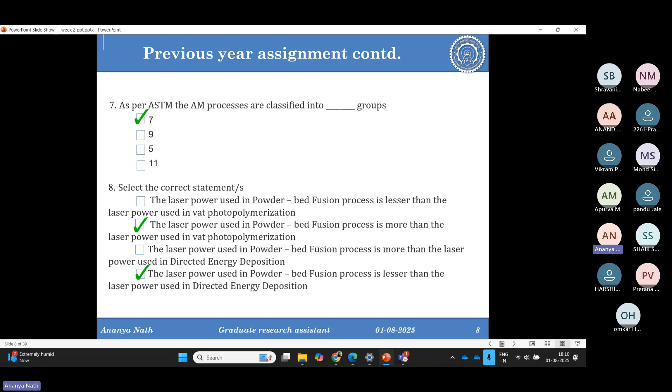Then it's option 7. So 2 is also correct. In vat photopolymerization, you just need the laser to cure the resin, which needs very, very less power—maybe 20, 30 watt can work there. Whereas in LPBF at least 400, 600 watt is needed.

The STL is not known by shape triangle lithography. Good. And STL format is a boundary representation.

Then we have a few lines of a triangle from the code. ASCII code is given below. So find out the unit vector in the direction of the facet normal of this triangle. Have you tried this sum in your assignment? Yes, yes. So could you do it?

So can you tell me how to do it if you have done it, or do you have questions? A cross B divided by modulus of A cross B gives the unit vector.

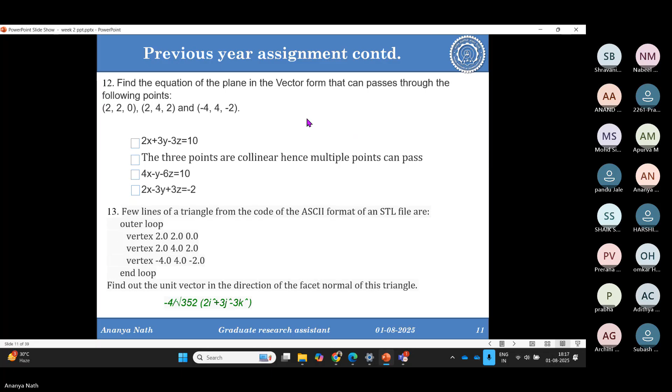How to get the pointer? Yeah.

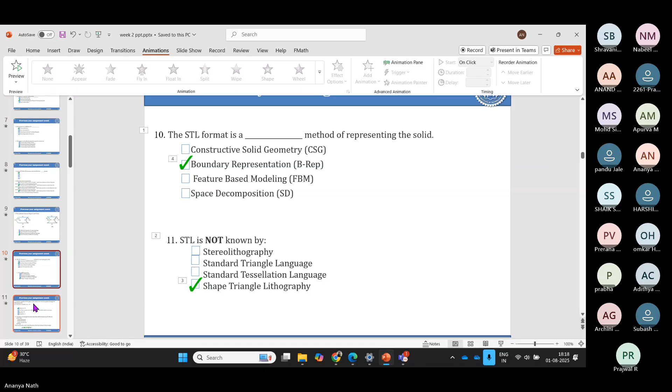Pen. Yes, so now we can write the vector, the mod like this, or determinant like this. This course includes a little bit of maths, so it's better if we revise this little trick for how to get the value of these things. First you put 2, then 4 into minus 2, that is minus 8, minus 4 into 2, that is minus 8. Like that you get the value of it, and it will come as minus 40. So it has some value.

That means these 3 points are not collinear. They are non-collinear, meaning it's possible to get the equation out of these 3 points, like a plane which passes through the triangle having these 3 points.

For that we have one formula. The formula is x minus x1, y minus y1, z minus z1; niche x2 minus x1, y2 minus y1, z2 minus z1; and then x3 minus x1, y3 minus y1, and z3 minus z1. If you put these 3 coordinates here and put x, y, z as it is, and set it equal to 0, then you get an equation out of it, and that is this equation. Is it clear? I hope it is.

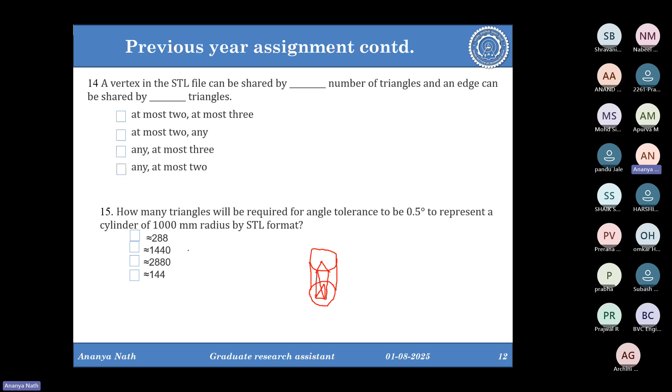So can anybody tell me the formula, or should I write it? 360 by n. Yes, so 360 by n, this is having 0.5. So n will be 360 by 0.5 degree, and that will come as 720. Into 4, so we get the result, which is 2880.

Then we have the next question: the vertex in an STL file can be shared by dash number of triangles, and an edge can be shared by dash.

Answers? 2. Last option, option D. Yes. A vertex in the STL can be shared — which is the vertices, so it's the point. A point can be shared by any number of triangles, but an edge can be shared by at max 2.

The number of triangles. Any doubt? No?

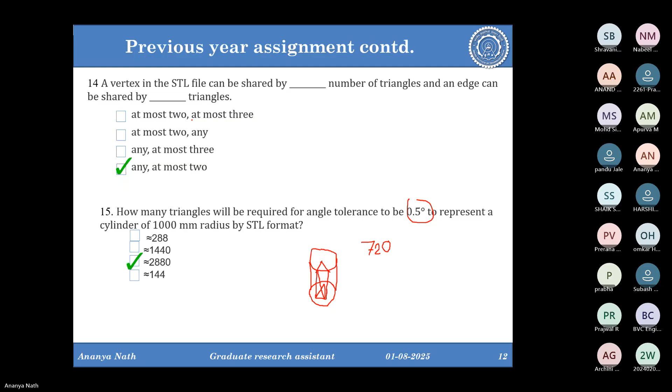So the next question we have: how many triangles will be required to exactly represent a pentagon prism in an STL format? The triangles will be required to exactly represent the pentagon. Yes, it's a tricky question, so think carefully and then answer.

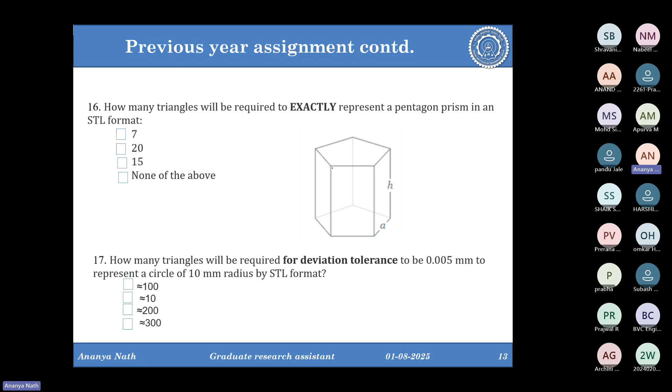How many? 7. Okay, any other answers? So how many triangles are required for one rectangle? The answer is 2, right? And we have 5 sides, so 10 we already require, right? So 7 cannot be.

Either it can be 20, 15, or none of the above. So 10 we have, plus to cover the top surface, how many triangles are required? Exactly, or minimum, how many triangles are required? Any guesses? Not a guess, but try to answer.

7. This is the top surface — I'm talking about just the top surface. So if I draw a triangle like this, 1, yes, so 3 triangles are needed to cover this top surface. So 3 into... plus the 10, that gives us the total.

So the answer is 16. Understood? So none of the above. Yeah, none of the options match. Answer is none of them.

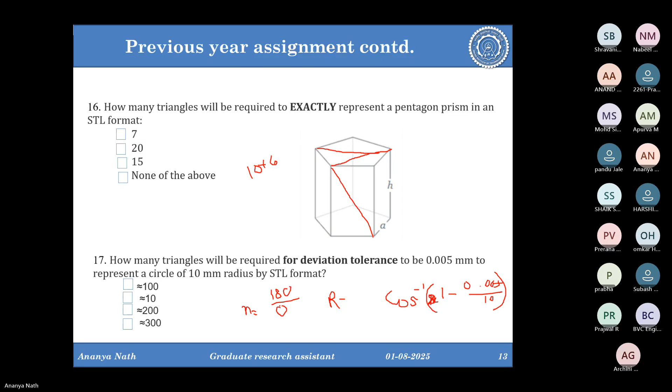Yes. So next, what to do to get the number of triangles? That is n. N will be 180 upon cos inverse theta. So 180 upon this whole theta. That will be equal to 100. So this is 100 and this is none of the above. Any doubt? This is just a simple formula.

So then we have week 2 previous year questions. If you have any doubt from week 1 topics, let me know. I will discuss it first and then we'll move to week 2 previous year questions. Or we can start with week 2 topics first and then go to the previous year questions.

Ma'am, the topic regarding continuous unambiguity, that portion is not clear. Which question? It is not in this question, but it was there in this year's assignment. Okay, week 2 assignment. Okay, that is not here.

Okay, so these are the previous year questions. So that's why I am supposed to solve the previous year questions, but you can just tell me the question that you are having doubt on. Then I can try to answer. If I can't, then I can search. Can you tell me the question?

I think I can open the question. So let me stop the screen. Does anybody remember what was the question?

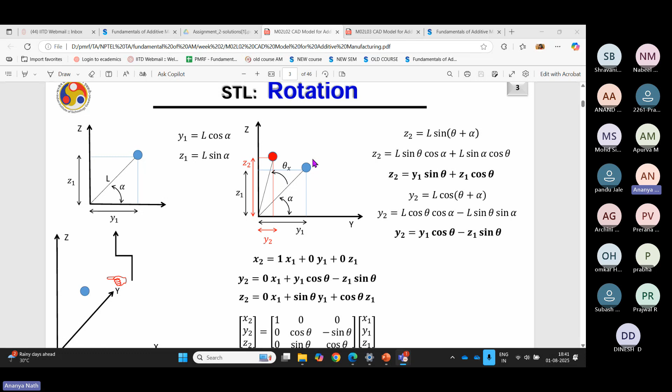If you rotate it to the theta position, then this will be L cos(theta plus alpha), and this will be L sin(theta plus alpha). You can expand the formula and get the new value of the vertices. This will be the coordinate after the rotation. This formula is very important for next week.

So week 2 question series - I will just tell you the important points from it. This is a very, very important formula. You should remember it, write it somewhere, and understand how you're deriving it as well. This formula will be used in multiple cases.

Next, we have the rotation - this is for one point. If you have multiple vertices of a triangle, using the same formula you can do that. Using the same formula, you can get the normal vector as well, because the normal vector will also be rotated in the same form. So you can get both the values of edges and normal.

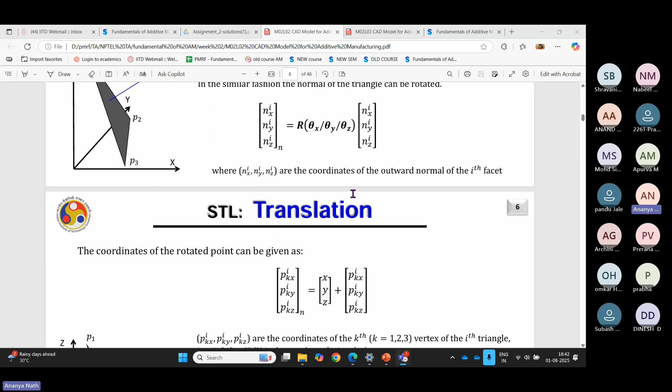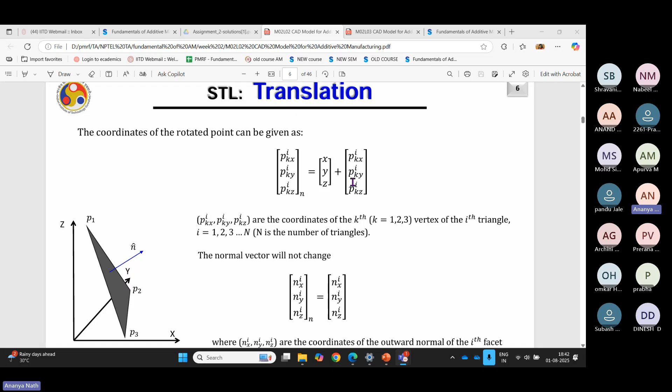Then comes translation. Translation is easy - you just have to add or subtract the value of the translation in the respective coordinates. If it's x, y, or z, you just add that coordinate value for translation, and you'll get the new position. Then comes the support structure.

As I said, this is called the orientation of the part. If this is a T shape, if I place it like that - this slide is very, very important, so you have to understand it properly. These are the three orientations I am having.

In the first orientation, we have this part and we have to place this support structure. Basically, this T is having some overhang portion, and under the overhang portion you have to put the support structure. So to print it, you have to give it T1 time.

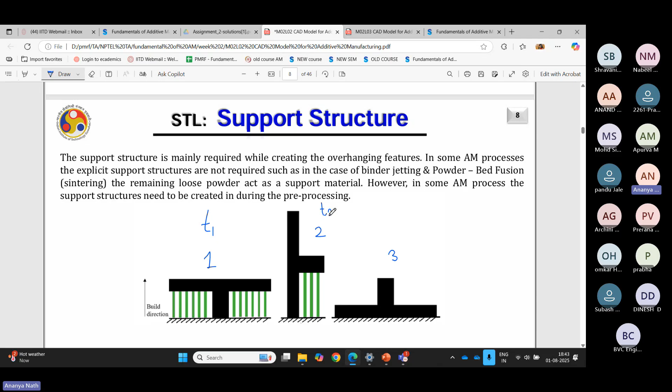This is the second orientation. Here, you will take T2 time, which is different than T1, obviously. But here you have less support - this is more support, this is less support. So now, can you tell me which one will be greater, T1 or T2?

T1. So again, it depends on the process, it depends on which additive manufacturing process you are choosing. Any other answers? Why do you think T1 will take more time? More support structure, yes.

Now if I turn the question around - if the additive manufacturing process is DED and the other additive manufacturing process is LPBF, then which process will take more time? Will it differ somehow? Because these two are both metal printing processes, but they have different process physics. So will it differ? Any guesses?

Ma'am, in T1 we have to cover more surface area, but in T2, we have to have only a smaller area to cover to print the metal. So I think so.

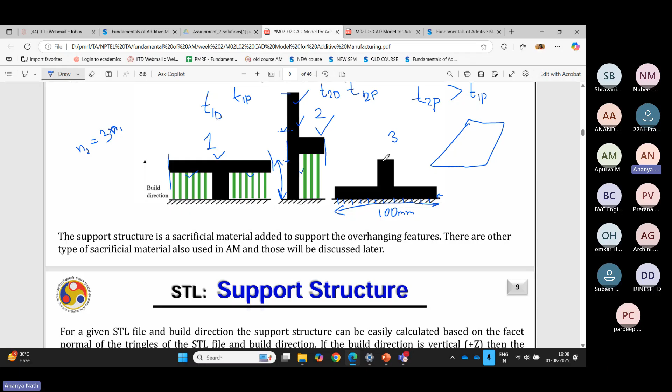Is it clear? Ma'am, I have one doubt. On the basis of DED deposition, whether one and two is taking more time.

Okay, that answer was not straight. In DED, as the material is coming at the same time with the heat source, the answer is not straight - this part will take more time.

I suppose number 2 will take more time because of the layers. But again, it's not easy like LPBF to say, because the DED head needs to move from this to this to this to print the supports. It's not same as LPBF. The DED head will move, so it will have some inertia and some velocity restriction. That's why it will take more time for each layer, so you cannot say this will take less time or more time.

Indeed. Am I clear? Yeah, because it's a different process, you cannot say this will take more time or this. But in LPBF, you'll surely say for this part at least that this will take more time. And the reason for support is clear - there are two vital roles of support: to support the overhanging feature and to dissipate the heat.

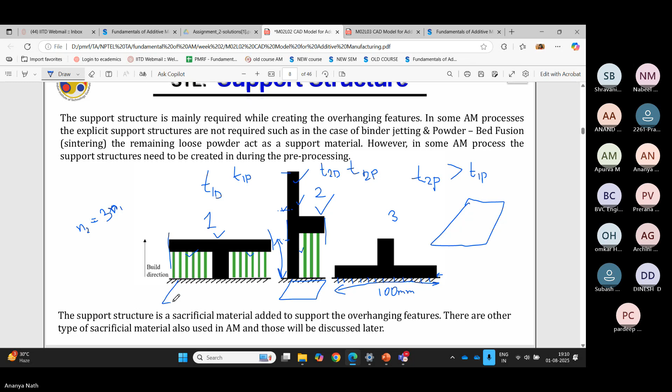No, it's like the surface area. This is the surface area for this part, this is the surface area for this part, right? Both the widths are same, the length is different, and the height is different. Width is same, so do not have to consider. Then lengthwise, it's more - this length is more than this one.

But to scan the length, the laser scan speed is already very high, and for the support printing, it's even higher than part printing. So you will not have a large difference in the layer scanning of these two - it will be very little. But as the number of layers will be almost 3 times, and in LPBF you have the recoating time also, that's why this will surely take more time.

Even though the surface area is less, since the height is more... the surface area will not matter much because this is just almost half of it, right? So it will take less than half of the time - like, to print one surface of this will take less than half of this, because the support structure will not take much time. Support printing is faster. So that's why I'm saying this will take more time because of the layering.

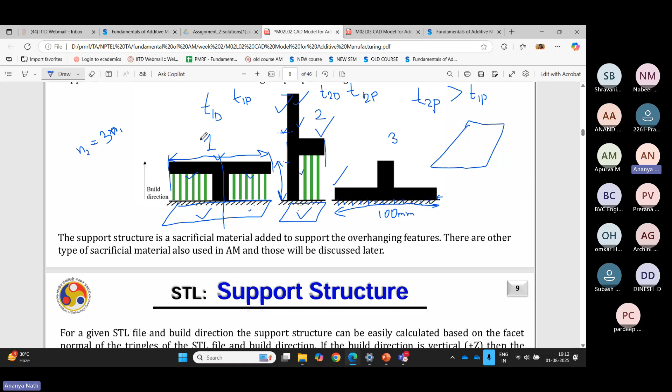Done, so let's go to the next. Orientation wise, this will be the better orientation because it's not having any support. And these two depend - if we have to have this surface to be intact, then depending on which process you are choosing, you can choose the part orientation.

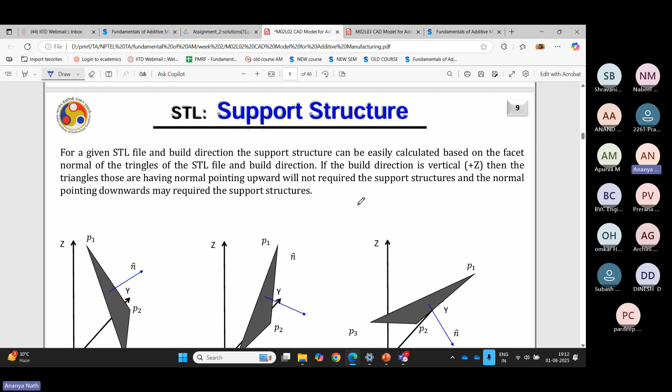So now, when do you think support is needed? Obviously, if there is an overhang portion, and that overhang is coming from the triangle itself, because the whole surface is covered by triangles, which is making the STL file, and the triangles will have a normal. If the normal is facing downward direction, that particular facet or triangle needs support beneath it. So if it needs support, the adjacent triangle will also need support, because one triangle is very small. Now how many triangles will need support, that you can calculate through a formula.

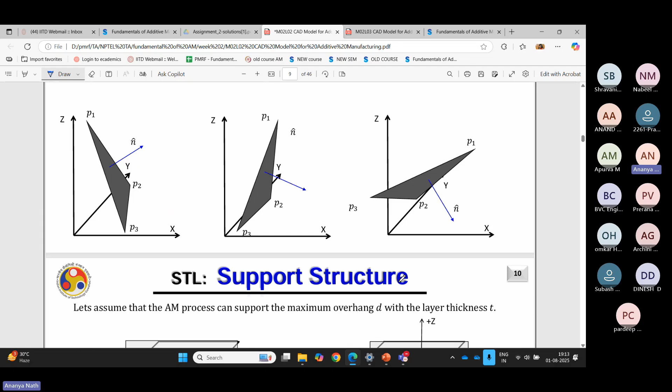But again, you can learn the formula from this - these are just simple mathematical equations, simple to understand. But the main thing to understand is why we are doing this.

You have to remember all 7 types of additive manufacturing have different process physics, because of which it doesn't mean that whatever process you are choosing, support will be needed. There will be some process which can print one geometry support-less, but other processes will need support for the same geometry. Right now I'm not having the part with me, next class I'll show you. I printed one part in VAT photopolymerization, and it was a supportless printing.

But that was the only process that could print the part supportlessly. All the other processes needed support to print the same part. So that is the difference. If somebody asks you, I have a part with an overhang structure, do I have to put the support? Your answer should depend on which process and which material you are interested in, because depending upon the material, you choose the process, and depending upon the process, you decide whether to go for support or not.

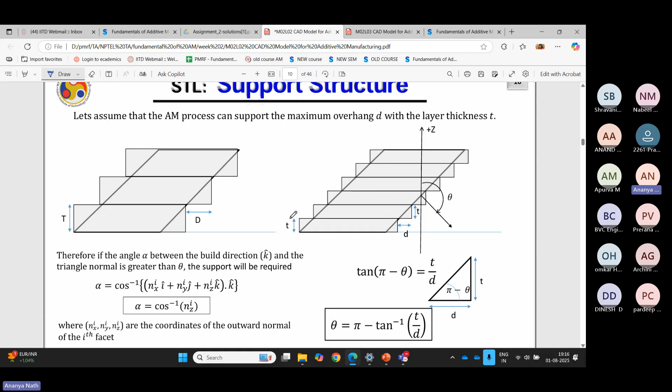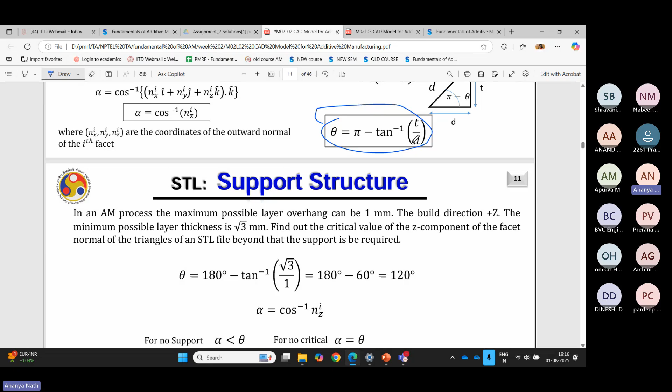So that's why your first question needs to be which material, and then which process. So this is the formula. You can note down this formula, especially since it's very important for support structure calculation. Using this, we haven't solved anything yet, so we will solve more problems using these formulas.

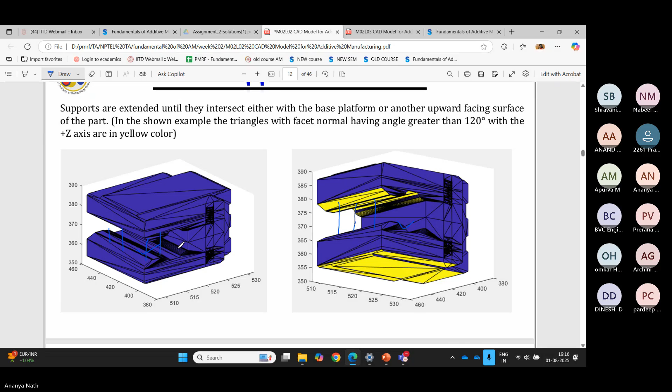So then comes this structure. It's also important that if you have a structure like this, your support will be connected to the part itself. Not only this surface will be sacrificed, but this surface too, and this one, because your supports will be connected like this, and it will be connected to this surface. That's why it's very important to orient the part.

If I orient the part like this, then you just need to have some support here. But again, it depends how much length it is having. If it's less than the overhang length required for support, then you can just avoid putting it.

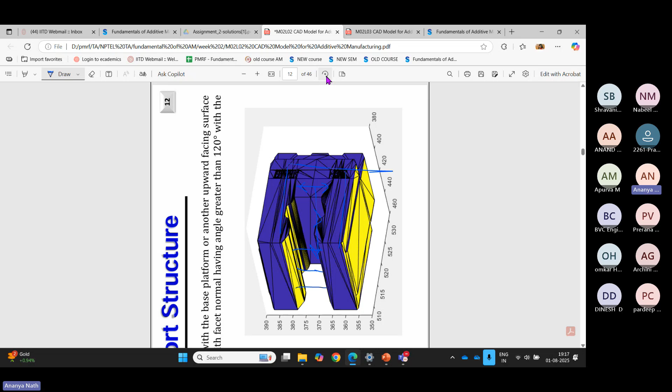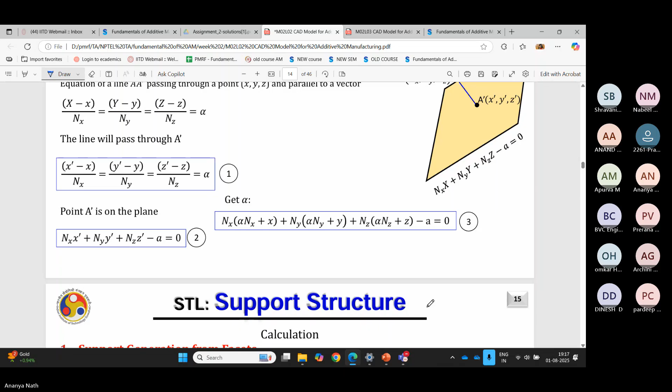Then comes the facets which need the support structure. So if this is the facet, this is the formula, you can get the angle or the length, and this is a key point you need to remember. In the sum, it will be given that this much overhang length can be self-supported, and after this you have to have a support. Then you need to calculate how much angle or how much support needs to be given, like how much volume of support is needed. So this type of sums will be there, the same type of sums.

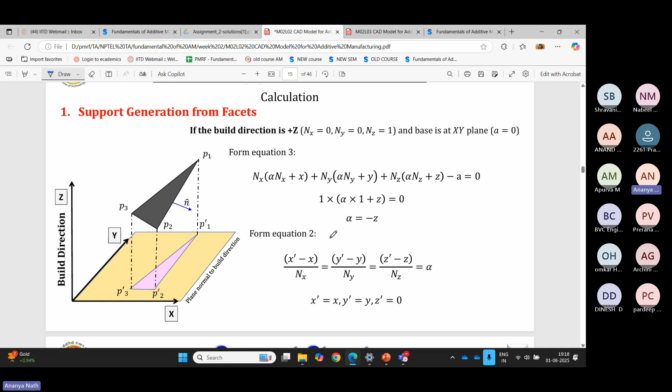That's why I'm not discussing it, because in the videos it's very nicely demonstrated, with sir giving some real examples that I'm not having here. I don't have any video, so that's why I'm not discussing these formulas. It's better to understand from there if you see the video.

So it's just showing that if this is the facet which needs support, then you need to draw the reflection or projection of it on the surface, and the projection will have the support. But for the projection, you need both the area and the height, because you need to have the volume of the support. Then you can calculate the volume of the support, or the volume of the facet which needs the support.

But it's not true that if your volume comes out to, for example, 3000 millimeter cube, you have to put 3000 millimeter cube of support. You can instead put tree-like support, which will look like this, having some branches to be self-supported and give self-supporting structure. And like that, you can minimize the volume of the support and still support the part. Is it understood?

You can have this type of supports, so you can save some surface of it, because you have to compromise the surface, and you can save the money for printing the support and the cost for the powder or the wire as well.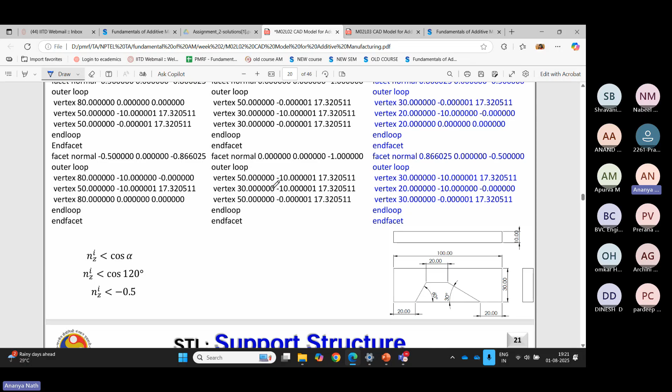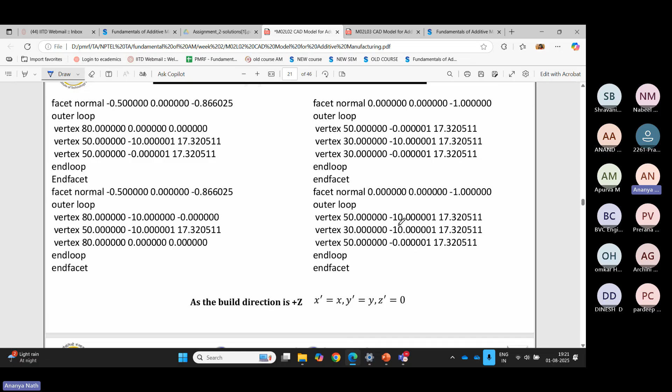Then comes the build orientation. This is the facet normal coordinates for this part to decide whether to put the support or not. There are some nice MATLAB codes that were shown in the video. I'm not having those MATLAB codes. You can go through the MATLAB codes, and if you are able to, you can make the MATLAB code and see.

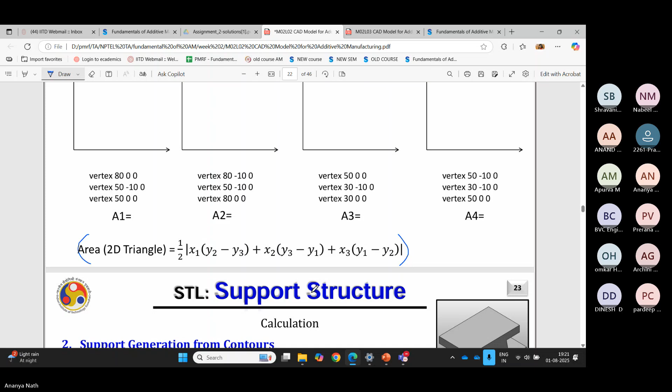This is an important formula to note down. This is the area of the triangle, how to calculate the area of the triangle. Because if somebody gives you a question with triangles that need support, you need to calculate the area of the triangle from the vertices, then have the height of the triangle, and multiply the area into height. This formula is true when it's two coordinates, like x and y. There is another formula for x, z and y coordinates.

Then there are methods for support generation. One can just calculate which facet needs support. Other method is the containment method. The containment method says you need to draw the contour of each slice. So after slicing, we can see whether it needs support or not. Or before slicing, we can also see whether it needs support or not. But you can slice the geometry in such a way that it doesn't need support.

This is also possible. From last week's lecture, if you remember, there were techniques for adaptive slicing, where in one part you put more layer thickness, and in one portion you put less layer thickness. If your layer thickness is less, you need less support, but you need more time for printing. So you have to compromise one thing.

In this method, you have already sliced the part, and you have the contours. Contours mean, in one slice, this is one slice - what is the projection of the part? If you join or merge all these contours together, you will have the whole projection of the part, and that is basically the support structure.

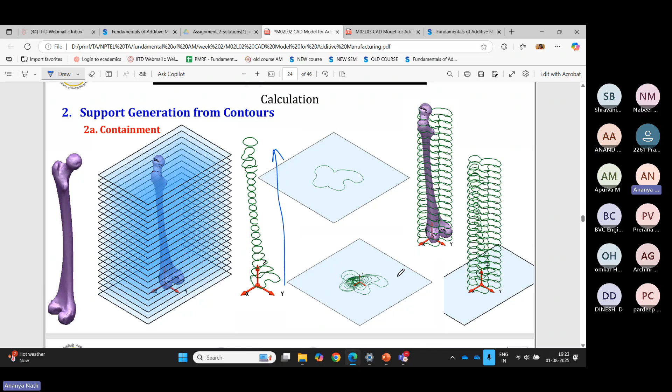For example, if you're talking about this nth slice and n-1 slice, the n-1 slice is the first layer, nth slice is the second layer. So the second layer needs some support in this area because this area is not covered by the n-1th slice or layer. This is the contour method by which you can calculate which area needs support.

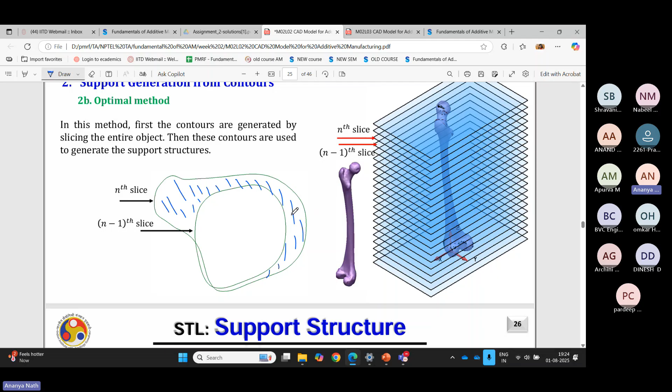So if you see this photo, it's better. If this is one layer, this is the second layer. This second layer's portion here is not covered by the first layer, so that's why this portion needs the support. Or if this part is the up layer and this is the next layer, then the difference between the two, this portion needs the support, which is here.

So you need to have support only this much. You don't have to have support in the whole area, not in the whole contour. You need to have this much support only. This is another technique by which you can calculate the support. This is just an example.

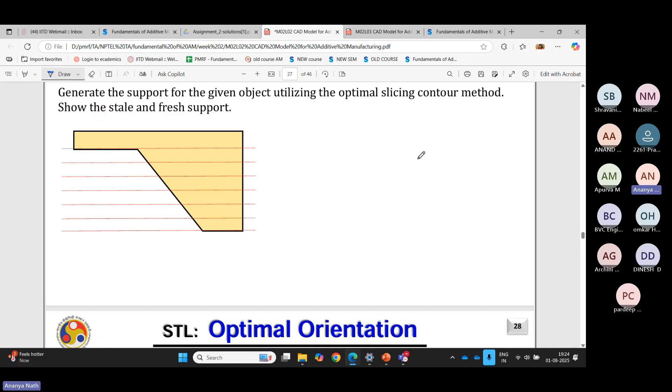Here also, in the layers, you can just put the projections, and I'll tell you one example. So this is one layer, and this is another layer. If your layer thickness is enough to self-support this portion, then you don't have to put any support. Or if your process is flexible enough to self-support this portion, then you don't need support till here, and you just need the support here.

When your support is fully in line with this inclined surface, it's called the stale support. And when you put the support in just the overhang portion, fully overhang portion, it's the fresh support.

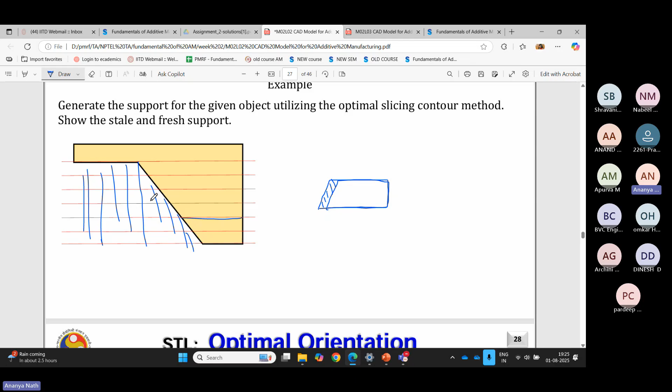So now you have the optimal orientation. As I said in the first slide, you need to optimize the support in terms of time and cost—everything is all around time and cost only. So there's cost minimization model, support minimization model, and multi-objective model.

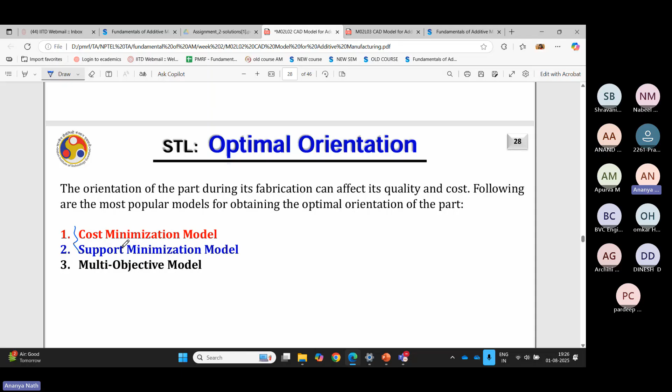These two models I have already discussed with you. In case of the cost minimization model, the total cost is equal to pre-processing, machine utilization, material cost, and post-processing cost.

Ma'am, sorry for the interruption. Yes, please go ahead. As per last week's discussion, if you had mentioned some problem concepts, that would be useful.

Okay, so I can just show you the problems from previous year question papers, and then I can tell you the formulas which need to be used for that. Is that fine? Sure, madam. Okay, let's go ahead with the questions then.

Our first question: a few lines of a triangle from the ASCII format of the STL file are given here, showing the vertices. Now you need to rotate the triangle 30 degrees clockwise about the z-axis, and then 60 degrees counterclockwise about the y-axis. Can anybody tell me how it should be done?

It's a very easy problem. First you need to put cos 30 and sin 30 into the formula for R theta z. Then for R theta y, it will be minus sin 60, cos 60. You have to multiply both of these with the coordinates.

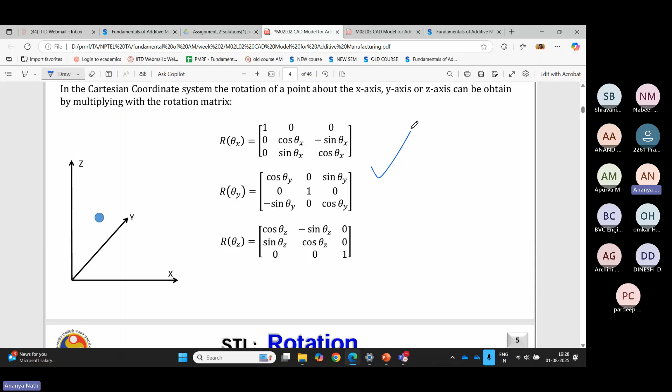The formula is very easy—we have already talked about this formula. This is the one you have to use, and then just put it like this. You have the vertices and you get the result—just multiply it.

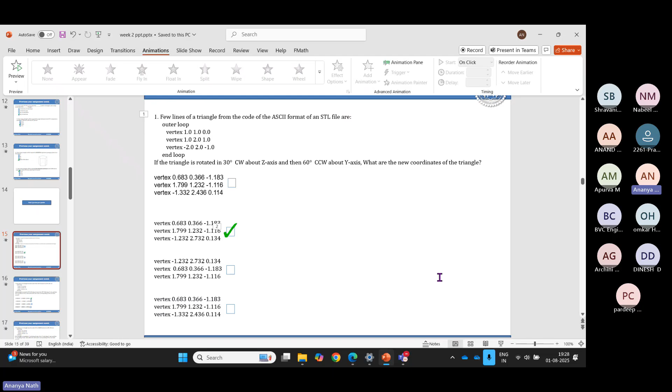Ma'am, do we keep all the thetas together, or one by one? No, one by one. First you keep R theta z, then R theta y, and multiply these two together. Then you'll get another 3x3 matrix, and you put one vertex value into this 3x3 matrix. When you multiply it, you get 3 points like this. Understood? The multiplication is so easy.

I have solved it and the same result is coming. Yeah, so you have to follow the order, and every time it should be three multiplications.

Next, we have a few lines of a triangle from the ASCII code given again—it's the same question again. This time it's 90 degrees counterclockwise about x-axis, then about y-axis 90 degrees counterclockwise, and again about z-axis 90 degrees counterclockwise.

So first you put R theta x for 90 degrees using cos 90, sin 90. Then R theta y for 90 degrees, then R theta z. Multiply R theta x with R theta y, then that answer with R theta z, and then multiply it with the vertices to get the answer. It's the same formula, same type of question.

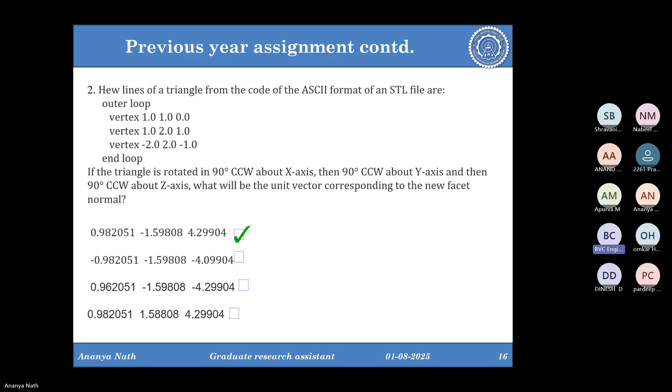Next we have the same question again, but it's translated. For translation it's much easier—you just need to put the vertices in this manner: 1, 1, 0 for vertex A. Now everything will be translated +1 in x, +1 in y, and +1 in x.

So A will be +1 in X, +1 along Y, and +1 along X. Okay, X may it's 2. So 2, 1, 0—everything will be translated in all three axes, so you just have to add it. So the answer will be 3, 2, 0 for A.

So this is the translation of the A vertex. The same way you can do it for B and C. Now you have to find what will be the vector corresponding to the new facet. For vectors, again, it's AB cross AC. AB is simple, you just have to minus it with A to C and then take the cross product.

So it's just vector cross product, and you have to divide it by the mod of AB cross AC. That's just the magnitude of the AB cross AC matrix, like x square plus y square plus z square, square root. X, Y, Z are the values which are there with the I, J, K coordinates.

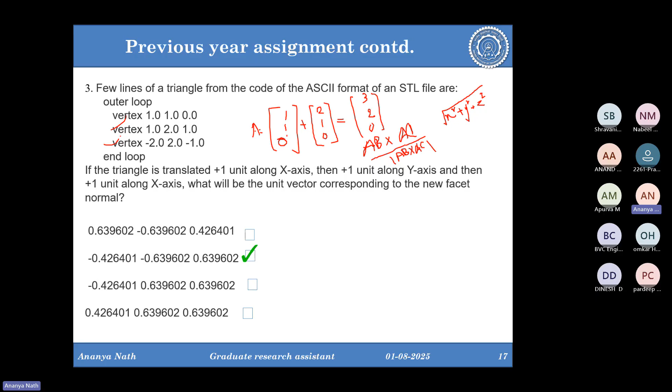Few more lines are given again. If the triangle is translated, it's again the same formula. It's translated plus 1 in y, plus... sorry, plus 1 in z, then plus 1 in y. So first you have to translate it. This is the matrix you need to add with these vertices. So the A vertex will have this vector 1, 1, 0, and you need to add this new translation.

When you get the three vertices values, then you need to rotate it in the Z direction. For the Z direction, you already have the R theta Z formula that I have written. So for Z, it's cos theta Z, minus sin theta Z, 0; sin theta Z, cos theta Z, 0; and 0, 0, 1. You have to put in that value.

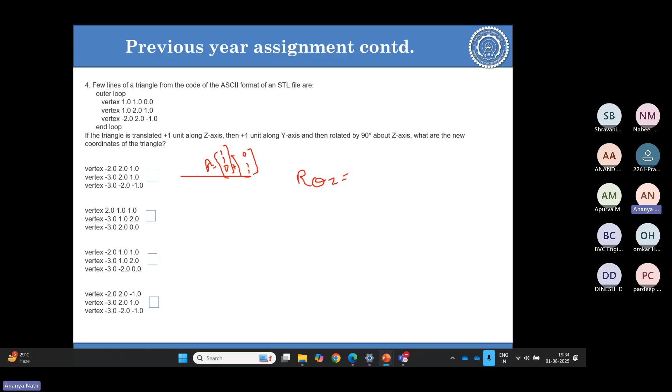Now you need to multiply it: the new A will be equal to the rotation matrix multiplied with the A matrix you're having, where A is the new A that you got from the translation. The same will happen with B and the same will happen with C. After that, the same thing: A cross B.

Here you don't have to do AB cross AC actually, because you need just the vertices. So it's done, and this should be the answer.

In an AM process, the triangles of the STL file with facet normal at an angle more than 120 degrees from the build direction require a support structure. A few lines of the triangle code in ASCII format are given here, the same code. So this triangle requires a support structure in the Z direction. So we need to calculate.

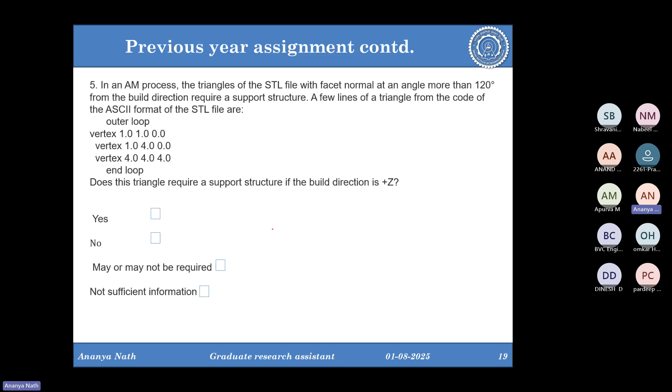So the formula is first at angle cos theta. Do you remember the formula by chance? Cos theta is dot, not cross. So this is the formula for cos theta, where n is the normal and m is the build direction. For example, the m value will be 0, 0, 1 because the build direction is the z direction.

And n will be equal to AB cross AC. AB you can get from the vertices, like subtracting one from the other. And AC you can get a similar way. Then you have to cross it with the vector I, J, K. You put the AB value here, you put the AC value here, and now you get one thing.

And then you can multiply it with this one. So it will be just the K vector — it's dot product. So Z equals the K vector because the value is 1 and it only has value in the K coordinate, not in I or J. Like that, you can get theta, which will come around 126 point something.

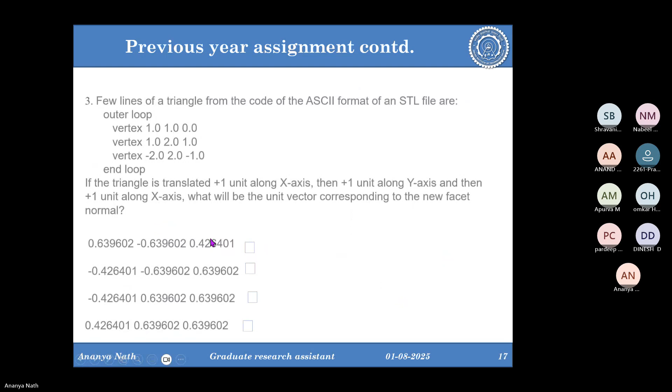Yes, actually, in the previous problem, your matrix — AB vector plus AC vector — you have written, no, madam? Not this one, this one I wrote but I didn't save it. So yes, you can ask. Okay, AB vector means vertex 1 and 2, yes. AC vector means vertex 1 and 3, yes. So if we multiply that we'll get a 3 by 3 matrix, no? Yes. No, you will not multiply it. It will be like I, J, K, and then the value of AB, and then the value of AC, and then you will get an equation of I plus J plus K.

That value of AB is nothing but the formula x2 minus x1, x3 minus... like that. The same way what we have solved in assignment 1, like that only, no? Yeah. Okay, same. Thank you, madam.

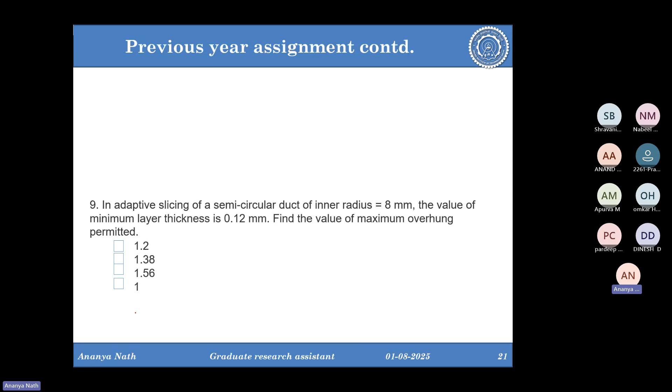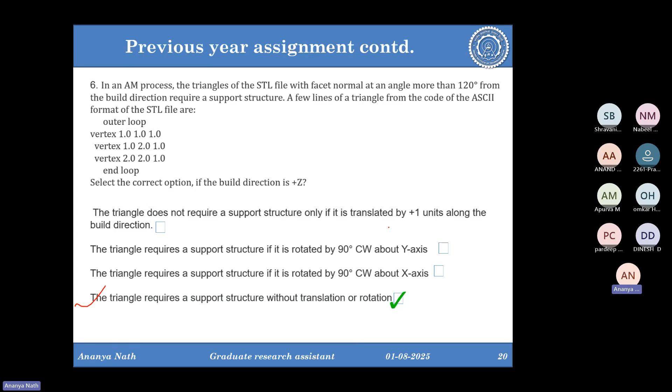Next is the solid sphere has to be built in an AM process. So this is the hint that I'll put for this question. This hint is there in the PPT, so I need you guys to solve it. And this is the diagram that I'm putting for you for this question. So there is a solid sphere. You need to print the solid sphere with STL.

And then if it's more than X degree, because it's increasing the degree, like if you draw the tangent, at which point you do not need the support, or till which point you need the support, that is X degree. So this is the diagram. Now you have to find out. For more reference, I have put this formula as well. With the help of this formula, you should be able to solve it.

The hint is: A is the previous one and A dash is the one that needs the support. So if you just do A dash by A, then you can get the X because you already have the formula. So that is the solution you should do.

Next question: in adaptive slicing, a semicircular duct with inner radius 8 mm is given. The formula is pretty easy. If this is the thing, minimum layer thickness, then it has a formula like this. You can note down the formula. Using this, you can find out the D, and D is our answer.

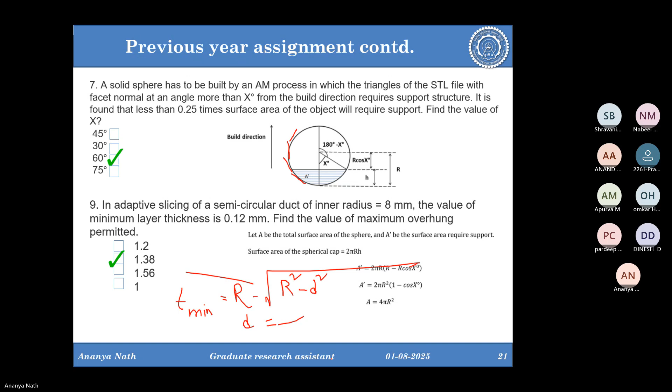Next, we have to consider the following orientation of the CAD model. And now, which orientation is good? So I need the answer from you guys for this question, please. Quick.

Answer, answer, this is so easy only. So it's the fourth orientation. The area of the base surface is maximum. And all other orientations will need the support structure.

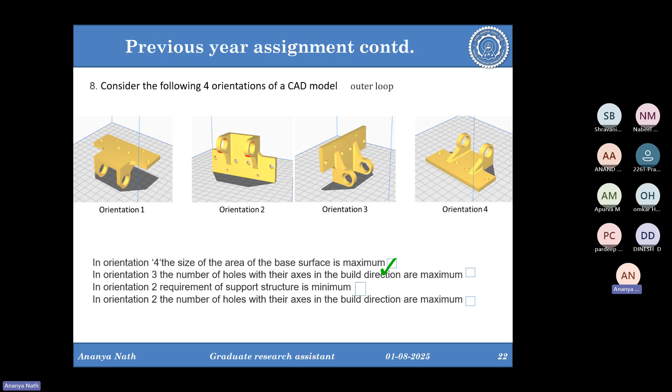So how much will be the volume of the support? So you need to find out the area of the support. So these are the area and the average height of the support, like the average height of the facet. So this is the height, and this is the base, and this will be the area. So you need to calculate it. And after calculating it, you'll have the area and the base.

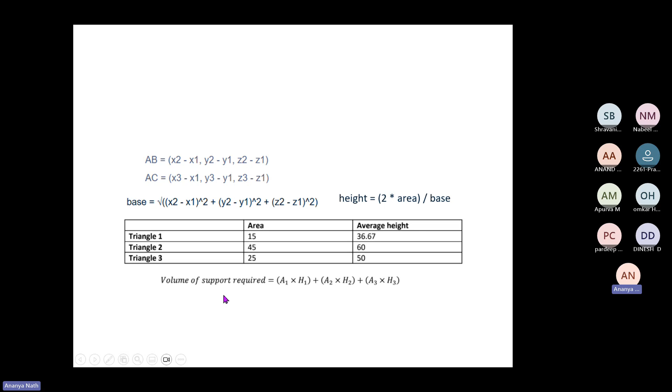This is the formula already for AB and AC. You can just multiply it for the base value and for the area. And then you have 2 into area by base is height. You have to just multiply the area with the height of each triangle and then sum it. You'll have the volume of the support. By this, your answer will be 4500.

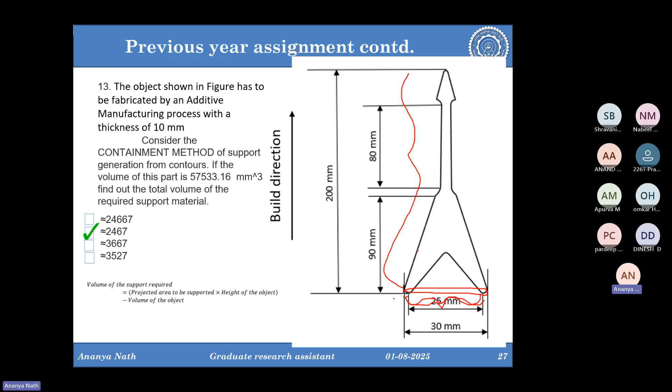So if I am following the containment method, I have to merge all the contours of the part. As I start contouring the part, this will be the contour for this layer, this will be the contour for this layer, and this will be the contour of this layer. So obviously the largest contour I'll get from this portion.

That is simple, yes ma'am. So that's why in the containment method, ultimately I have to sum all the areas of the contours, and obviously the sum will be the biggest part, which is this one.

So I have to get the area of the projection of this contour, which is nothing but 30 mm, and the thickness is already given as 10 mm. So 30 into 10 is 300 — that's the projected area. Now the projected area is multiplied by the height of the object, which is 200. So 200 into 300, whatever the value comes, you subtract it from 57,000.

And that will be the volume of the support. Understood? So ma'am, the support will be there in as much area as there is base material, is it?

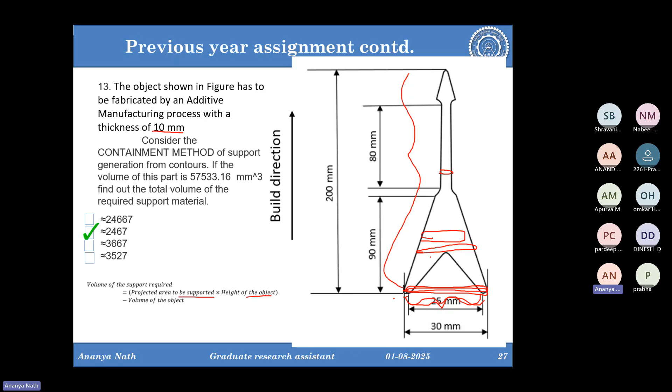Yeah, so basically you need to have support. According to the containment method, you need support in the whole area, which is not required in reality, but according to the method, which is useful for other parts, you will get the value of the volume of the support. The largest area you need to find out, multiply it by the whole height of the build, the part, and then subtract the volume of the object.

Next, this question is again very tricky. I need you to be very concerned here, because it says the object shown in the figure has to be fabricated by additive manufacturing. Consider the OPTIMAL method of support generation from contours, and find out the ratio of volume of stale and fresh support.

Stale support is something which will be attached in this portion, and fresh support is something which will be attached in this portion. But if you understand the process along with doing the multiplications, you will understand that for this part, I do not have to put any stale support. Why would I put stale support if I'm already putting a fresh support? Do you agree with my point?

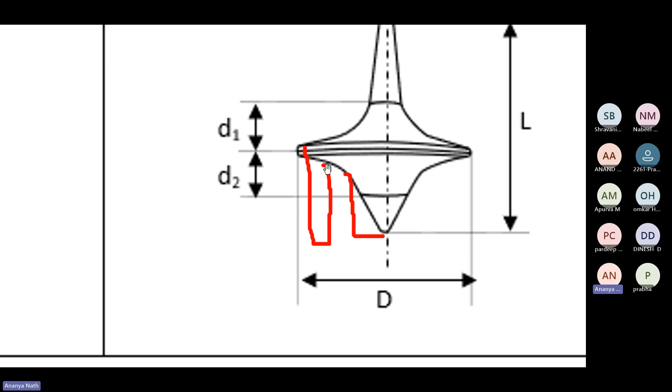You only have to have this fresh support in this part; you do not have to have any stale support. So the stale support is 0, and the answer is 0. This type of tricky question will be there.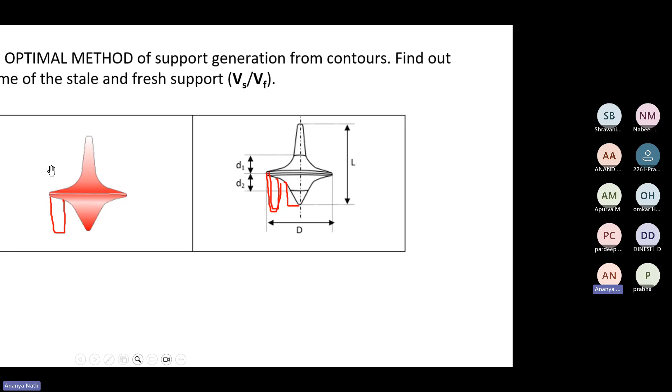Ma'am, once again please. Yeah, so if you see this geometry carefully, you'll understand that if you put a fresh support here, you do not have to put any stale support here — it will be self-supported. This geometry shows that it will be self-supported.

But the normal vector is facing downwards, so don't we have to support it, no madam? No, that's not true, because as I said, there will be an angle and length of overhang which needs to reach a threshold value — only then do you need the support. Otherwise, you don't need it.

So that means we know theta from this portion — you're telling theta is greater than 120? Yeah, it's not always 120, it depends on the process. I'm repeating it again and again, it depends on the process, but for simplification we are taking it as 120 here.

But not for this problem — for this problem you don't have to consider anything. You just put a support from here and it will be self-supported.

This is the normal understanding you have to have when dealing with 3D printing. When you see multiple parts, you'll understand slowly. It's not like wherever there is a tilt, I have to put support. If I put a fresh support here, I don't have to put any stale support there. I just put the fresh support and it will be self-supported. So that's why the stale support is 0. The answer will be 0.

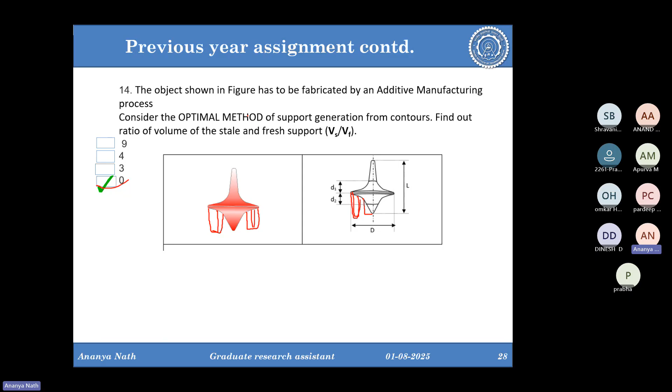Going to the next question, it's a big one. A part to be manufactured by an AM process has been examined in 3 angular positions: orientation 1, 2, and 3. Again it's a very simple question, just very big. So for one orientation, I'm doing the sum for you, and you have to do the same for all 3 orientations to find the answer.

In this sum, you'll be given the projected area on the base and the height of the triangle. If you remember from the past few slides, the volume of the support is all about the projected area of the base and the height of the triangle. If you multiply these two together, you get the projected volume, and projected volume is nothing but the support volume. If you sum all the things, you get the support volume, and you'll do the same for all 3 orientations.

The answer is orientation 1 and 3, because these two will have the same amount of 12800 volume of support, whereas the second orientation will have a little bit more than that. Is it understood? It's very simple math.

Ma'am, both the orientations will have the same value of volume? Yes, for this problem it came the same. I could not understand what they're asking - examined in 3 angular positions, corresponding to this angular position the following was observed. So orientation 1 and orientation 2 are given. What is the expected thing they're asking? I could not understand from this question. Let me tell you - if you see the table, what data is available?

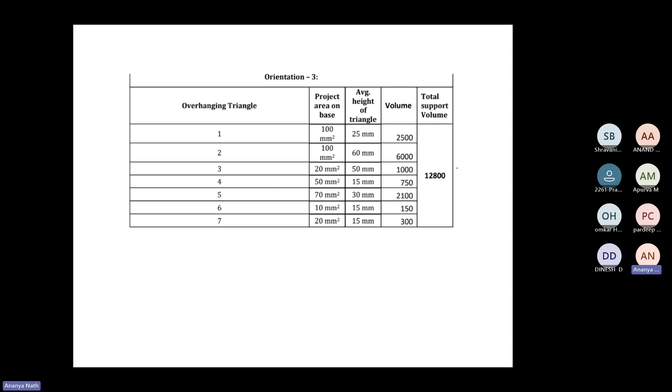So this is for orientation 3. You have 3 orientations here. You simply compute 30 into 40, plus 40 into 25, plus 20 into 5, plus 60 into 75, plus 80 into 75. If you do this, you'll get some value - that is the support volume, because from the overhanging triangles, we take the projected area and height, multiply them, and we are getting this result, which is the support volume.

Again, for these 10 overhanging triangles, I will get the support volume. Yes, I understood that, but what is the question they are inferring, what do they want to infer from this? The question was incomplete - I understand the question is a little bit incomplete. I have to check whether I put half the question and forgot the other half, or they mistakenly put half of the question - I need to check that. But for this type of question, I'm just showing you the possible solutions.

So as the support volume will be less in case of these two, I'm correct. I'm giving my answer as orientation 1 and 3. This will be the better orientation than 2. That is the answer I'm putting. But the question is which part you will consider.

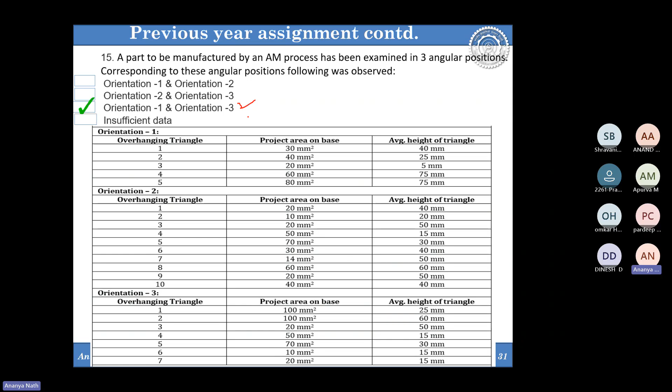Is it clear? Because of the less support volume, in terms of support structure. I think the question is incomplete, that's why we are confused. So match the best suited.

So A is machining allowance required in positive tolerance. If you give positive tolerance, it means you're putting some material to be machined later on. If your object profile requires dimensional preservation, then it's adaptive, because in adaptive you slice in such a way that you don't have extra material or less material in any of the parts, and thus you can reduce the support also. Slicing over a non-planar surface is conformal, because in that case your machine has more than 3 degrees of freedom. And wax dipping post processing is a negative tolerance, because you have put less material onto it.

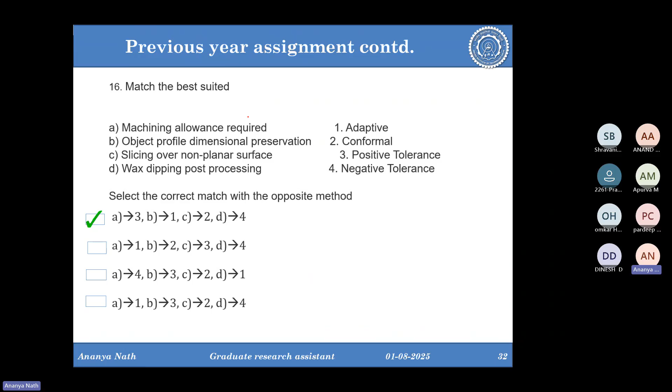So question 17: an object built in Z direction, a few lines are given. How many points need to be recorded for an intersection between a triangle and the slicing plane? If any of the Z coordinates is less than 0 or equal to 0, then you need to be concerned about those triangles; otherwise you don't. Here, there is no triangle with a 0 or less than 0 Z coordinate, so no points need to be recorded.

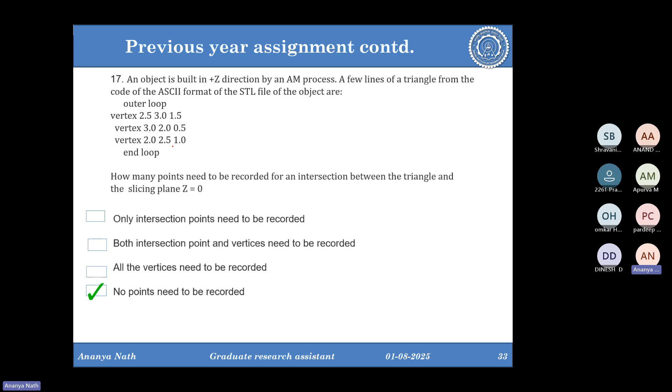Next question: an object built in Z direction. A few lines from the ASCII code are given in the options. Which of the triangles participate in the slicing procedure for Z equal to 1 and 2? So here the same thing: if they are participating in Z equal to 1 or 2, that means one of their vertices equals Z and the other vertices are at least less than that, or one vertex has Z equal to 2 along with other vertices which are less than 2.

So the possible answer is the last one, because here we have Z1, which is less than 1, so already some of the portion is below this line. If this is Z equal to 1, this is Z minus 1, so it's already below the plane. That's why.

Could not understand, please explain once. So if I have a plane which is Z equal to 1, and Z equal to 2, the question is which points need to be recorded. Your point only needs to be recorded when your part has a value less than 1 or less than 2. So in this option, your triangle has one point at -1 and then 2, 2.

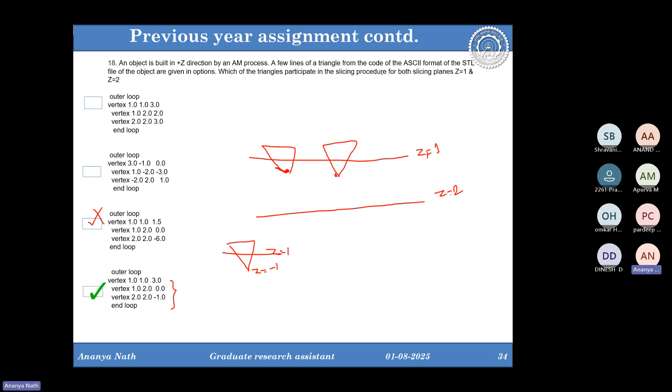In this case, the triangle has -6, but the other coordinates are like this, so it's not intersecting Z2 because this is less than 2. Is it clear now? In this case, it's intersecting the plane number two, but not intersecting plane number one, because none of the coordinates are less than or equal to 1. Here it's equal to 1, but again it's not equal to 2, because the question says both planes need to be intersected — I thought only one plane.

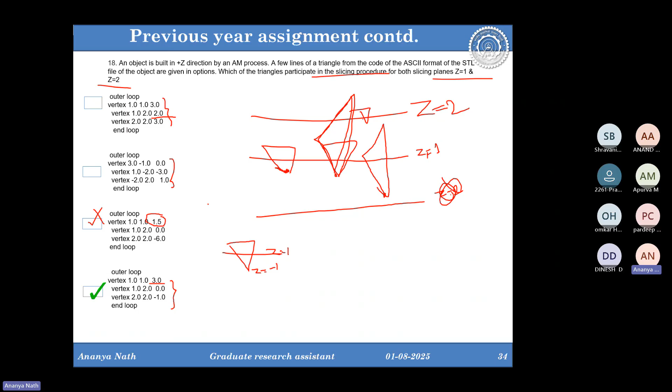Understood now? Thank you. So last object is only last option, right? Because otherwise it's not cutting both the planes. If it's one plane, then the third option will be correct as well. So it's easy, you just have to read the question carefully.

So the 19th question is that ABC is given. The direction of the building is +z. Find out the intersection point between the triangles and the slicing plane. It's very, very simple math.

So basically, for one axis I can show. For A, B, and C, you have the coordinates. That is 3, 6, 0. Then you have 2, 1, 0.5 for B. And for C, you have 5, 2, and 1.

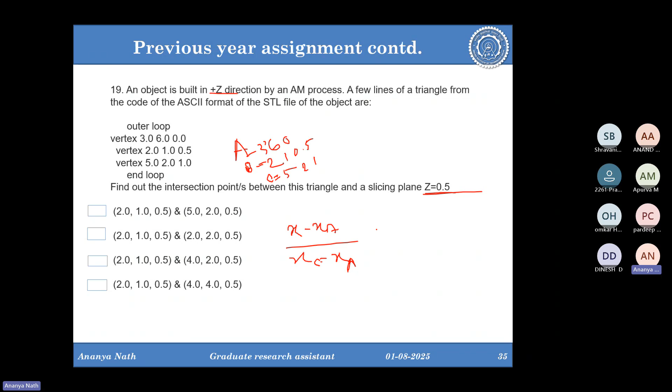So now it says which slicing plane - this is the slicing plane 0.5. Z equal to 0.5, so that needs to cut this slicing plane. So first you have to find out what is x minus xa by xc minus xa. This is the equation of the plane which is passing from x, c, and a, and that needs to cut z equal to 0.5. You'll have x equal to 4.

Then similarly, y minus ya. I'm just taking one vertex and calculating yc minus ya, that equal to 0.5 because that is the plane it needs to intersect. By that, you will have y equal to 4. Already I'm matching with one answer. So similarly, z minus za equal to 0.5. Similarly, if you do x minus xb over xa, then xb minus xa equal to 0.5, you will get x equal to 2. So like that, this is the option.

So a little bit I have done here as well. Why are we taking x minus xa, xb minus xa, and x minus xa, xc minus xa? I am considering this x, AB and AC vertices. We have two vertices, so I am forming a triangle with this x, so that I can get the x value which is cutting this plane.

This is the plane which has z equal to 0.5 but x and y as 0. So if I can just write an equation of a line which is cutting this plane, then that is the x coordinate I am getting from this equation. Am I clear?

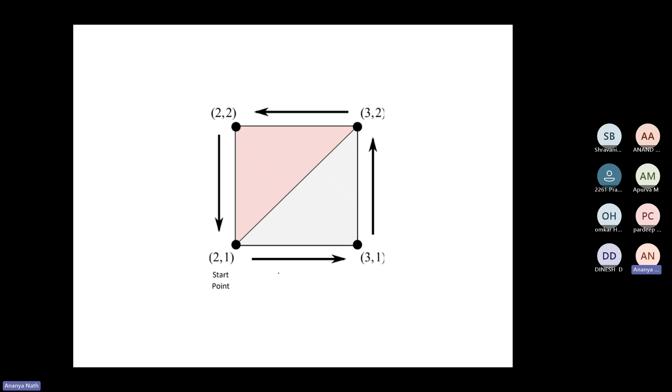Now I see this, this is another information they have given me: 3,1, 2,1, 3,2. This is the triangle. And then they have given another equation, which is 3,2, 2,1, and 2,2. So this is another triangle.

Now, from the previous class, do you remember how we write it and then how we find out if this is counterclockwise or clockwise direction? Counterclockwise direction, yes. So this is the counterclockwise direction I'm getting. Here also it's counterclockwise, this is also counterclockwise. That's why I have put this arrow, counterclockwise.

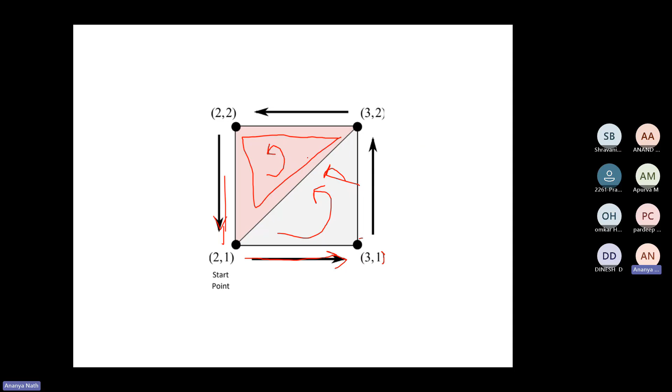There is one doubt, I think. Somebody tried to ask does it matter from which point we start counting counterclockwise? It shouldn't matter because this is the intersecting point. So whether you start from here or here, that is also one triangle. But this is the start point we have written because here also the start point starts with 1 and 2,1. If you see these lines, it says 1,2,3,4. So 1 is starting with 2,1. That's why I've just written 2,1 is the start point.

Okay, if they haven't given anything, then you can put anything, but they will give you because you have to have the starting point. So now I already know this is counterclockwise and this is the starting point, so I just put the arrow like this.

When I have put the arrow, if I want to tell the software that this is the facet I want to describe, then P1 is that plane: 2,1, 3,1, 3,2, 2,2. And if you want to draw another, as the option says, 4 edges are obtained by an intersection between the horizontal plane Z=1 and 2 triangles from the STL, a few lines of the triangle are given. The intersection points are given below.

So now if we have to make another, then this rotation is counterclockwise, so my next second starting point will be this point. Now if I start from this 3,1, then my points will be 3,1, 3,2, 2,2, 2,1. So this should be my correct answer.

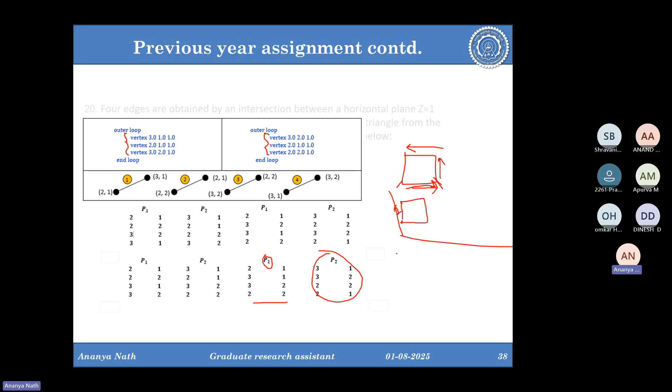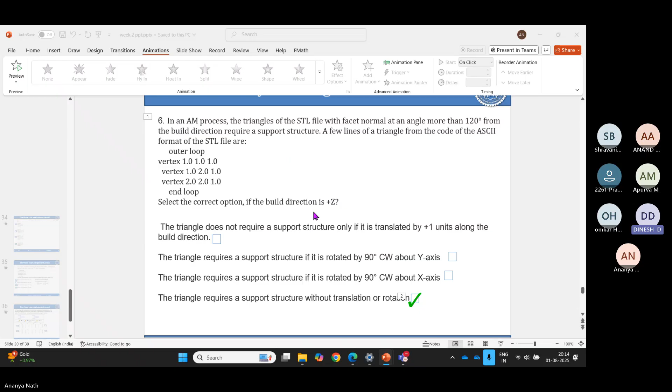Is this clear? It's simple, but it's a little bit complex, so you have to just think peacefully. Understood? No comments? Understood, ma'am, thank you. Understood? Yes.